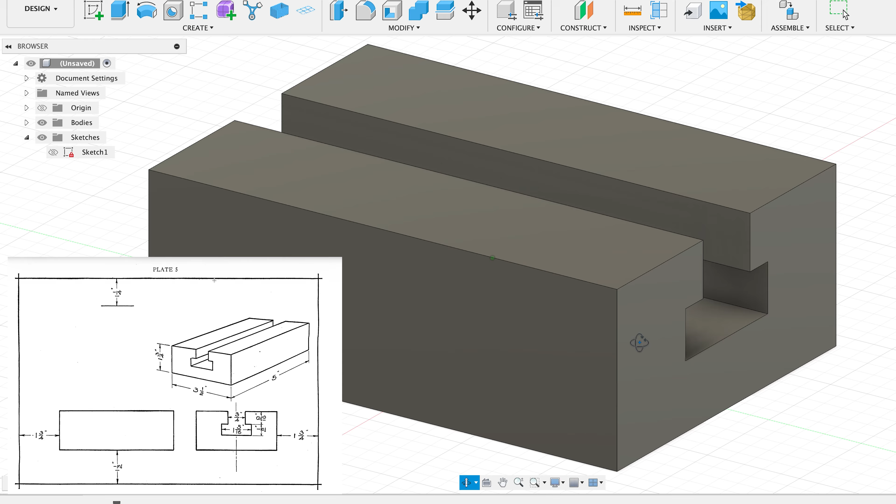This Autodesk Fusion tutorial is part of a series of learning Autodesk Fusion fast from a mechanical drawing problems textbook. Each video in the series goes through a different mechanical drawing problem and then makes that drawing in Fusion, learning new techniques and 3D modeling methods along the way.

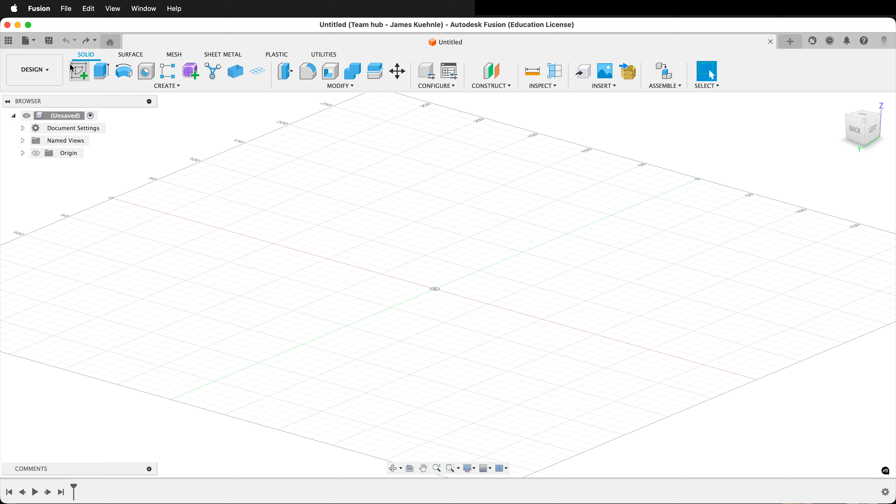This Plate 3 diagram from the mechanical drawing problems textbook has a T-slot. We're going to draw the side view of this T-slot and then extrude it so we have this piece in Fusion. The first thing to do is just go ahead and draw in this shape in Fusion. To do that, create a sketch, select this wall, then press L, and we'll draw the T-slot. You don't have to be perfect with your drawing, but get the general shape.

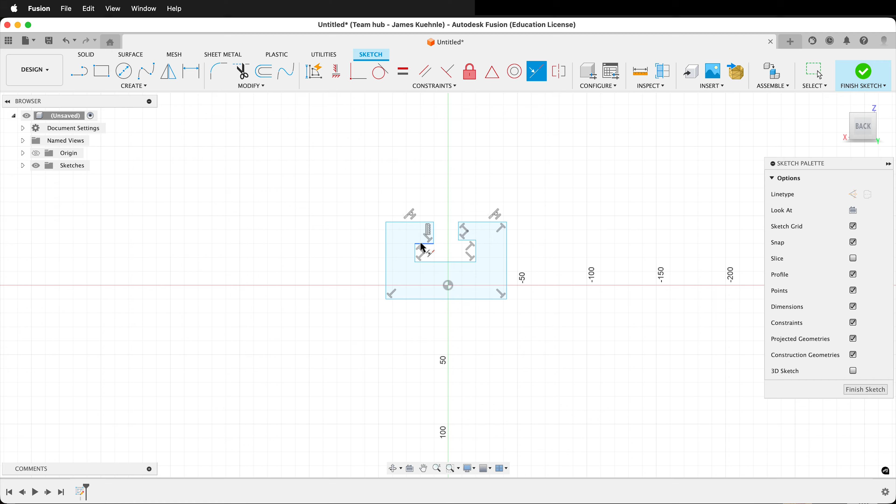Now we'll use sketch constraints in Fusion to make this more constrained. First, select the collinear constraint. I can select this line, and now they stay collinear. I can do the same thing with these two lines because I know I want them to be the same. We can also use the equals constraint on this line and this line because I want those to be equal. The same with this one and this one.

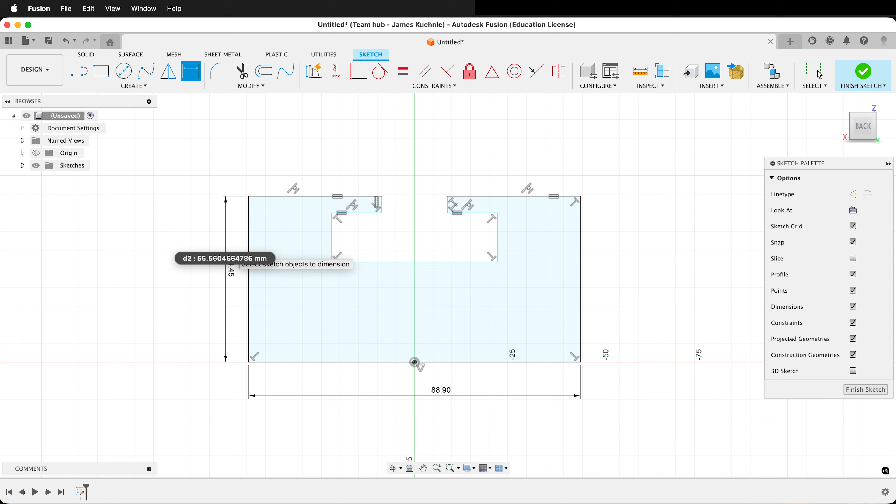Next, we can use the midpoint constraint on this line and the origin. This will snap it to the middle. Next, let's look back at the sketch and start adding some dimensions. Here we know this overall dimension is 3.5 inches by 1 3/4 tall. Press D, select this line, 3.5 IN. Then select this line, 1.75 IN. Next, we can put this dimension of 3/4 and 1 5/16.

Press D, select this line, then this line, 0.75 IN, 1 5/16 IN. Now we can add this 9/16 and 1/2 inch dimension. Press D, click this line, 9/16. Sometimes Fusion doesn't let you type in a fraction, but you can put times 1 and then the unit and it'll work fine. Select this line, 0.5 IN.

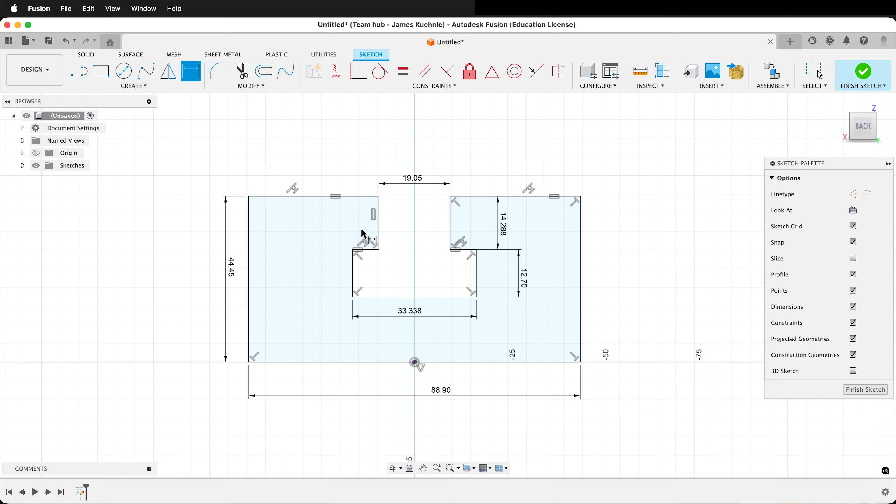Now we have all the dimensions for our sketch, and we can double check that in the browser, and we see this red padlock. That means our sketch is fully constrained. We can finish the sketch and then extrude. Here we can see this particular piece is 5 inches long. So we'll press E, select the piece. The direction will be symmetric. The distance will be 2.5 inches.

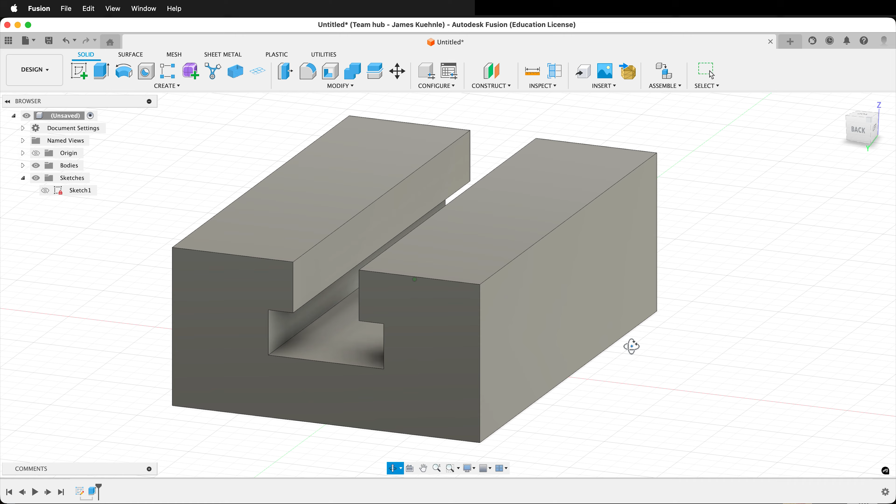And now we have a T-slot that we've modeled from a mechanical drawing problem in a textbook. We've learned some new Fusion operations along the way, and we will continue with this series learning Fusion and drawing principles. We could have made this with a symmetrical option and a mirror, but we'll explore that in the next lesson. Happy 3D modeling.